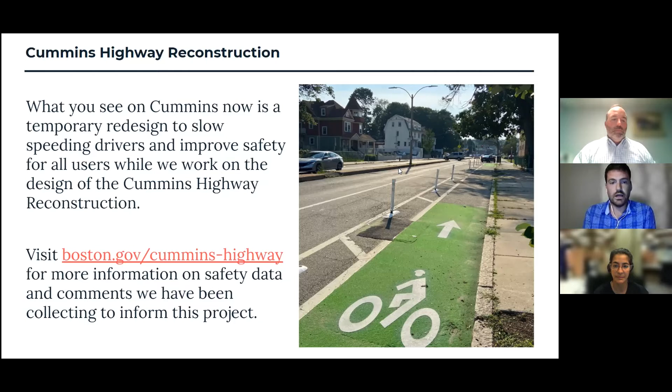So in the next slide, I'm going to go over some of the project history of Cummins Highway. Cummins Highway hasn't been updated since 1955. That's a long time. Back in 1953, the streetcars were removed, which provided more room for cars, reflective of the priorities of the 50s, which was to enable folks to drive through the neighborhood more quickly.

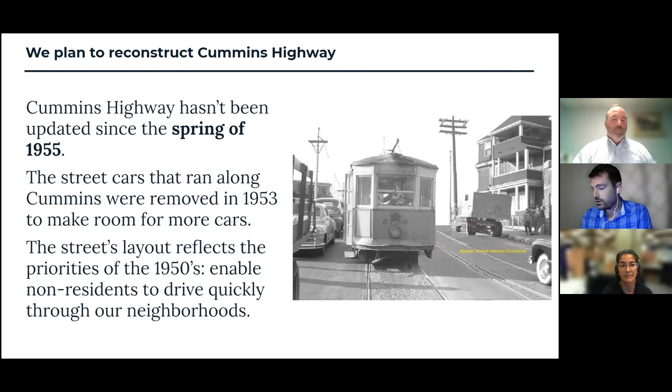Next, we're going to talk about what we're looking at for Cummins Highway as we move into the future, and what we're looking at for reconstruction. For a reconstruction project, it's a full reboot of the street. We're completely rebuilding everything, including sidewalks, curbs, street lights, what we're here to talk about tonight, traffic signals, the road pavement, and we'll update any utilities as necessary.

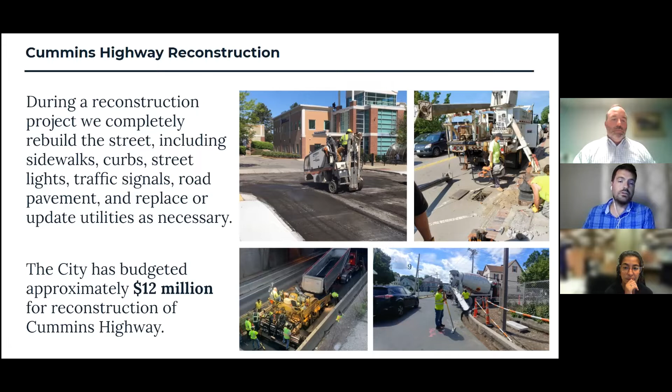As I'm sure you're all aware, even right now as we're implementing the pilot, National Grid is out on the street updating their infrastructure as an initial step. So we want to make sure all the infrastructure gets upgraded, and we have a whole chance to look at how the street is and how it functions today. We've budgeted approximately $12 million right now in the city budget for the reconstruction of Cummins Highway. So on the next slide, we're going to take a look at how we're interacting to develop the design.

As you know, we can't produce a design without your input. It was 1955 when the last major upgrade to Cummins Highway took place. So this is our chance right now to take a look at Cummins Highway and figure out what it should be for the next 70 or so years.

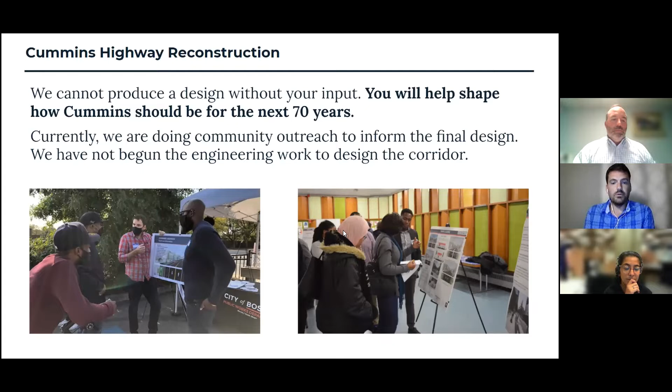We're still working through community engagement on the design, like this meeting, and we have not begun the actual design work. We're still talking out issues like tonight when we're going to talk about street lighting. The pictures below show some of the events we had with our pre-COVID in-person meetings, and some of our pop-up events where you can see Jeff and I talking to folks about the design and getting feedback. So in the next slide, we're going to jump into some of the overarching goals.

One of the things we're looking toward for this project is Go Boston 2030. What's that? That's Boston's transportation master plan heading into 2030, and the highlights are improving safety, reducing emissions, and equity and access to opportunities. Cummins Highway is certainly part of the Go Boston 2030 effort.

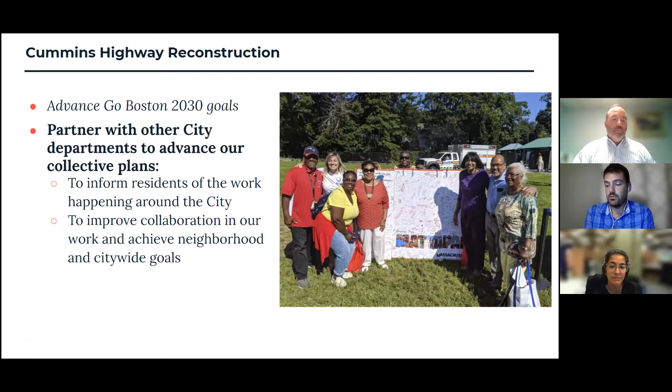So advancing those Go Boston 2030 goals, one of the key things we're doing is partnering with other city departments and communicating with them. These include, but are not limited to, the BPDA, Boston Transportation Department, Neighborhood Services, and the Disabilities Commission, to help us inform residents of the work and improve our collaboration in the neighborhood to achieve the goals of Go Boston 2030.

Also as part of that is continued collaboration with residents to advance your goals. We want to have awareness and participation in efforts you care about and confirm your vision for the future of the project. This means continued outreach like the meeting tonight to discuss key components like street lighting, so you can really help us inform that project vision. So now I'll hand over to Mike Donaghy from our street lighting division. He'll talk more specifically about the topic of the night, which is street lighting.

Thank you, Zach. Thanks to everyone for attending. It's my pleasure to showcase our street lighting team. I'm going to talk on three fronts. I'll start by giving you an overview of street lighting so you have greater context for our operation and overall purpose.

Then I'll jump into what's probably the most important part of the presentation, street lighting on Cummins Highway as part of the reconstruction effort. And finally, for additional context and looking toward the future, I'll talk a little about the future of street lighting and some applications that may potentially overlay well with street lighting infrastructure.

As the title of our department clearly states, we are responsible for the ownership, operation, maintenance, and replacement of a majority of the street lighting throughout the city of Boston, with the exception of properties managed by DCR, MassDOT, and MBTA.

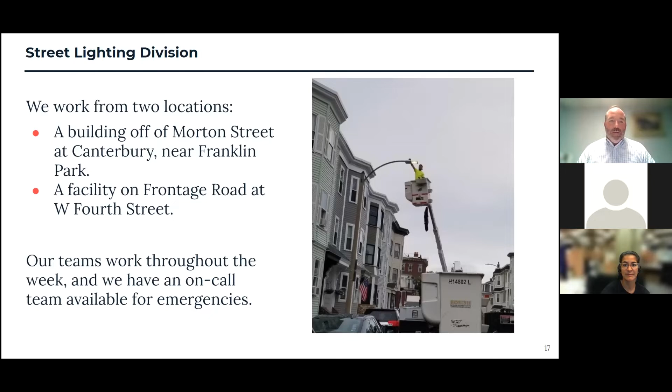We maintain and repair 19 different fixture types throughout the city. I'd like to tell this group I'd like that number to decrease as soon as possible. I'm a strong believer in streamlining inventory to maximize our maintenance schedules and shorten our times to repair. That's one of the long-term initiatives we have, streamlining the lighting without sacrificing any of the aesthetics we have in the city.

Our most common street lighting types are the Pendant, the Aeriata, the Cobra Head, and the Acorn. You'll find the Cobra Head and the Aeriata prevalent on Cummins Highway now, especially the Cobra Head, which is the double arm fixture in the median of the Cummins Highway roadway. The Pendant and the Acorn are in a different classification we refer to as our decorative pole types. Those are our most popular and are prevalent throughout all areas of the city. The Pendant fixture in particular is pertinent to tonight's presentation because it is the primary fixture, and to give credit to this project, the prime opportunity to really revitalize lighting in this area.

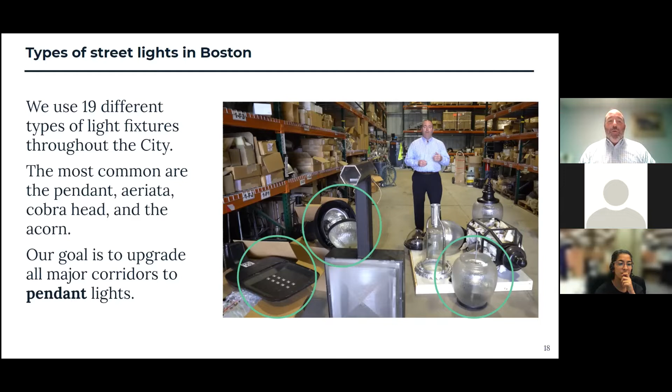The Pendant is a beautiful fixture that can be found on Center Street in West Roxbury, Hyde Park Ave, American Legion Highway, Huntington Ave, Beacon Street, Comm Ave out by BU, and other parts of the city. It's an extremely popular fixture, both because of its aesthetics and its performance on the roadway. As you can see in the last bullet, it really is our main goal to look at all major corridors and upgrade them to decorative lighting. It's the general idea that you're entering some part of the city through these main corridors, and from a street lighting perspective, obviously we're biased, but we think what better way to do that than with decorative lighting.

Starting in the fall of 2010, the city embarked on an aggressive campaign to upgrade all inefficient street lighting to LED. This was upgrading fixtures such as high pressure sodium, metal halide, and mercury vapor. In a very short amount of time, partnering with Eversource, the city achieved a substantial completion rate that has brought us to the point we're at today.

So this brings us to our next quiz. In the 10 or 11 years since we've started the LED program, how many lights, or what percentage of our lighting portfolio, has been converted to LED? Keep in mind, we're at 68,000 lights that we manage. We'll wait for your responses.

In the interest of time, I can let the audience know that we've completed upgrade of over 55,000 lights, which equates to 80% of our overall lighting portfolio. We continue to upgrade, and we're looking forward to continued partnership with Eversource to see that every last light within the city of Boston is LED. We have an opportunity through the environmental department, who's pursuing a performance contract currently out for bid, that will minimize, if not eradicate, our upfront capital costs to upgrading those lights. We're very excited about that, and we hope to have that done within the next 5 years.

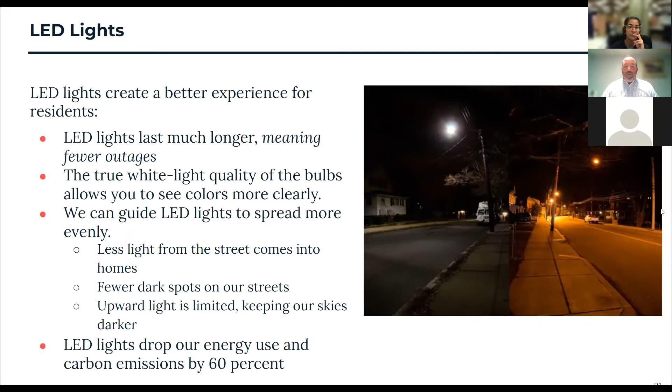There's another emerging area that we manage, and that is small cells. Effectively this is an FCC mandate to install telecommunications equipment on streetlight poles to improve network connectivity throughout any given area - certainly for our own interests, the City of Boston. The City of Boston Street Lighting Division is tasked with managing these telecommunications companies so that they conduct their operations from design through the construction phase, through operations and continued maintenance, in a way that maintains or improves the quality of life for the constituents that it interfaces with.

The benefit to the constituent is improved connectivity, but there are also abilities to improve lines of communication for emergency response purposes, and it prevents networks from getting proverbially jammed in the event of a catastrophe. I hate to put it in those terms, but that's exactly why the mandate is in place. Next slide.

So this is what we've all been waiting for. Before we jump to the next slide, I'd love to focus in on a few things, and I hope I'm not hitting on too many pains that anyone on the presentation has experienced. What I see here is a locational issue with a streetlight in the middle of a roadway, a very busy roadway. It's ripe for getting hit, and it happens quite often, as I'm sure you know. I see overhead wire going in three different directions, which I'll explain in a little bit. It's a necessary evil to get the light lit, but it looks terrible and it's inefficient from a logistical perspective.

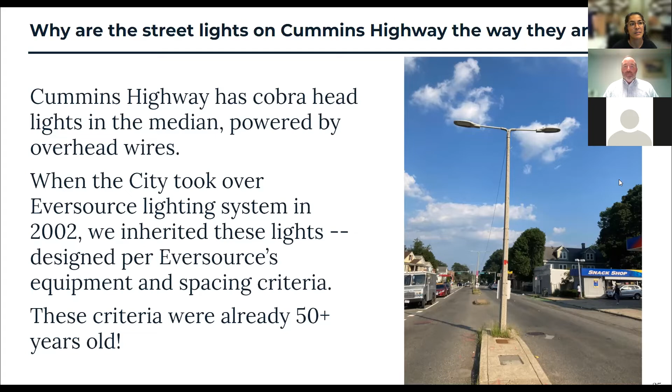Our general goals for this project, and for projects around the city, is to provide adequate, right-sized lighting, improve safety and security, make sure crosswalks are appropriately lit, that constituents feel safe, and that the benefit is multifold. In terms of spacing, the existing lighting is upwards of 100 to 150 feet apart. A pendant lighting pole, like you see to the right in this picture, is slated for 75 to 90 feet apart on both sides of the street. We think this not only meets the criteria for roadway lighting standards, it will provide a tremendous amount of illumination that shouldn't be too much.

I think the fact that we're meeting here today and presenting to you is a conversation that started early. We're looking to partner with you on these lighting solutions, so you shouldn't worry necessarily about overlighting. It's about bringing the lighting that's there up to the standards that exist throughout the city of Boston.

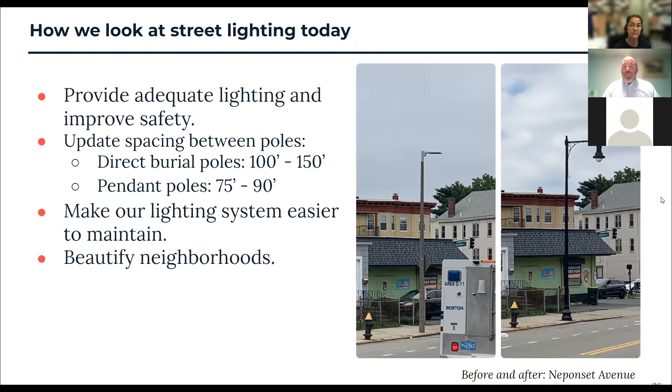One of the primary initiatives for any new lighting installation that we're very cognizant of is making sure we're not contributing to light pollution. Our goal is to improve the quality of life for everyone and everything involved, and so we take very seriously any type of criteria and specifications of the street lighting we install.

A majority of our street lighting is focused on down lighting, which helps mitigate light pollution and helps us work towards dark skies compliance.

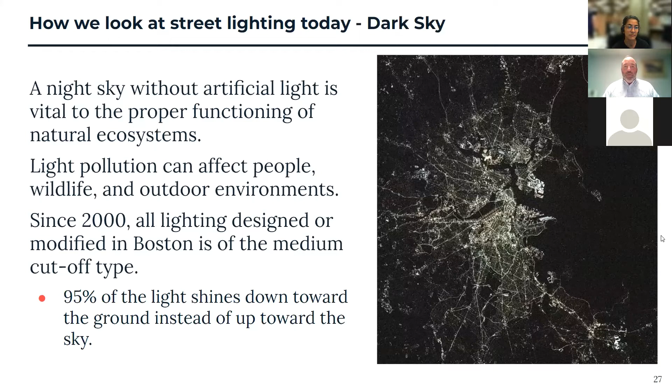I'm very excited that this project will entail installing a brand new street lighting system. That means infrastructure, underground conduit, pole bases, cabinet bases, pole box bases, and certainly new lighting. This will be brand new and in great shape for decades to come.

What I personally really enjoy about these lights is the scalability. We're going to be able to improve the distance compared to what the lighting is there now. And while this is designed as roadway lighting, and we are technically the street lighting division, as the world changes in terms of urban planning, we're now moving towards sidewalk lighting and trying to expand our own horizons as it relates to roadway and sidewalk lighting.

That small light you see mid-pole is prevalent in Nubian Square and helps to light what appears to be a bike path, but also provides benefits to sidewalk lighting and pedestrians passing by. You can see an example of that in Nubian Square, and an older example is in Upham's Corner.

Some of the current and recent projects we have—I mentioned Neponset Avenue, we saw the picture of the before and after. It's all of our internal street lighting team. They do a fantastic job and take great pride in their work, and we've embarked on Neponset Avenue, which has been a nice start.

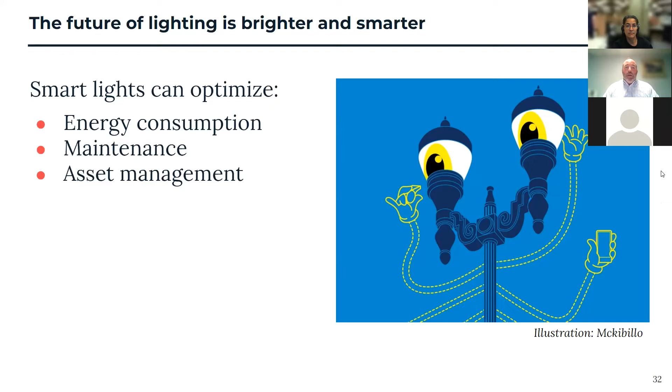Next slide. Again, the possibility of providing a 24/7 power source is there. Traffic counts and traffic monitoring is another potential, and again, it's the ability to have location-specific information that can be helpful either to constituents or to basic city services.

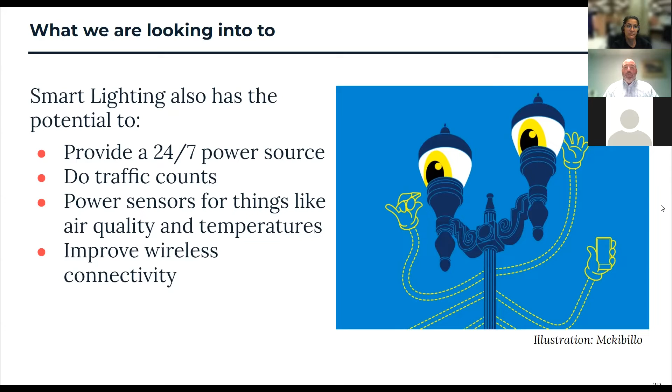One area that I'm particularly interested in is ambient air monitoring and temperature sensing. Having worked snow fighting for the last 4 years, and actually having Cummins Highway as my route last year, having the ability to identify temperatures across the city allows for more predictive management of our snow fighting forces. It's something that's very intriguing, and I think is in some ways low hanging fruit, because if you can get a temperature sensing device onto these lights, it'll be a profound help to our snow fighting operations.

Next slide. So, questions for you. I think this is the point that I turn it over to Daniela.

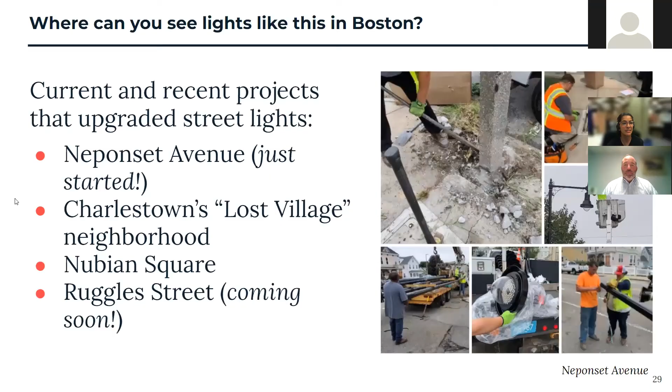The ability to put on that pedestrian light is entirely scalable. It isn't required. You may have locations where the pendant pole is close enough that the sidewalk is illuminated. There may be other times that this is the preferable option. That's what we like about this particular fixture family, the ability to scale not only the design of the light, but also the illuminance and light levels. We can scale all of that to tailor it to the constituents' requests.

Barbara, did you have anything else to say? I see that your hand's still raised. Yeah, will it be operated by solar power, the lights?

No, that is not in the design. They'll be powered underground and fed back to a streetlight control box. That is the main operations center that will be powering the lights. Those take redundant feeds from the utility manhole and will utilize a control pole system where one pole will monitor the light levels during the day and then initiate the lights as it gets darker into dusk, or turn off when dawn presents itself. It's the system that's prevalent throughout the city and something we feel works pretty well.

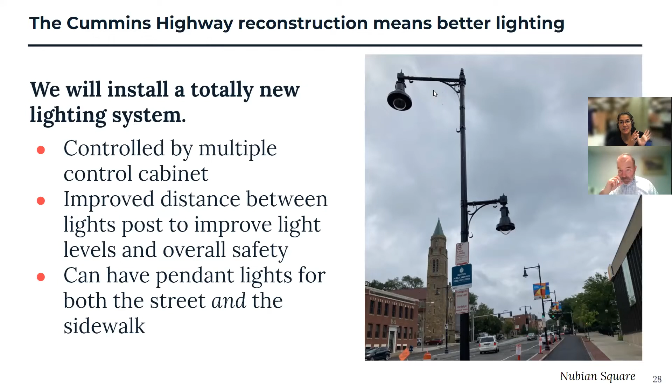Before we move on, Mike, could you speak a little bit as to why we prefer to have this system versus solar power lights usually?

We've looked very closely at solar powered lighting, and right now we can't count on the reliability of the light. You effectively need a battery backup that can withstand the power requirements of the lighting for undetermined amounts of time. If the solar panel isn't catching the light correctly, it leads to variables in low power charging and presents too many issues with either low light level or no light level scenarios. We looked very closely at this for a lot of our alley lighting down in the Harrison Avenue area, and we simply can't count on the reliability of the light staying lit when we need it to be illuminated.

I will now ask Kenya to unmute. I have a question and a comment. The question is, what is the brightness or the wattage of the bulbs in those light fixtures?

So for a given pendant light, it's 75 watts. And one of the first notes I took down was about color rendering and Kelvin ratings. I won't bore anyone who hasn't delved into that world, but effectively color rendering has to do with the light color. We strive to have a warmer light as opposed to a very bright white light. At my own house, I brought home 4,000 Kelvin LED screw-ins, and I had a problem because of how bluish the light was, and my wife let me know that. So we have a great appreciation for light levels and striking that balance of making sure there's sufficient lighting in the roadway, but not making it too cumbersome to your overall quality of life or overlighting your front yard.

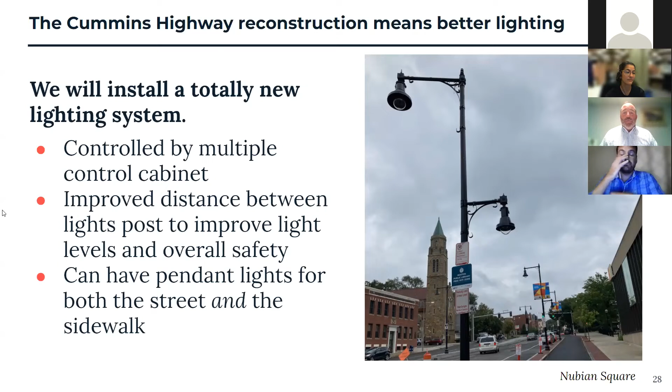We see this as a tremendous opportunity to put in a light that we think will work very well in this area and certainly improve lighting levels. But as it interacts with tree and canopy design, that's something that would be a larger question for the engineering department.

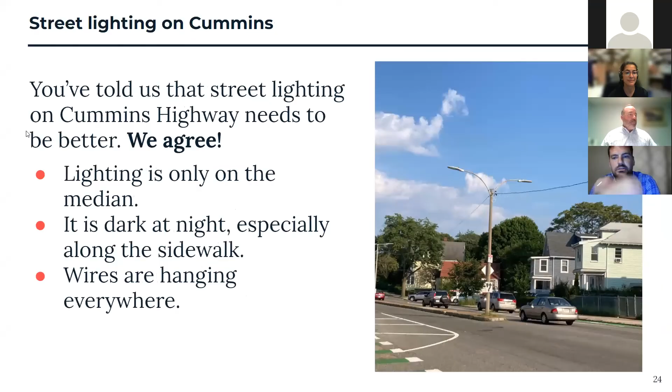Sure, and I'm happy to chime in. All of this is comprehensive. I don't know if you caught my slides at the beginning, but we're looking at an entire reconstruction of the street. So this includes new sidewalks, new lighting, new street trees, paving the street. All of that is factored in. So as we take a look at reconstructing Cummins Highway, we're looking at all of those elements, and all of those are tied into one comprehensive design.

So the location of the street lights are there to provide adequate lighting, not only for people driving on the street, but for people biking and walking. There'll be space so that they're not blocked by trees. New street trees will go in, and the lights will be positioned so that as the trees grow, they're not interfering, and they'll be at appropriate locations to light up crosswalks and make sure the street is a lot safer for all users.

So yes, it's totally a comprehensive effort. This meeting is just specifically to talk about the details and get some feedback from you all about the lighting and what we're thinking about it. But yeah, everything ties together in this roadway design.

All right, that would be my hope for the community. So if I can pursue a couple of follow-up questions: there was conversation about the potential that each of these streetlights had, right? So potential is different from actual use. Is there a plan already for what will be the minimal features of these lights? And are there options for us to start talking about these other potential uses?

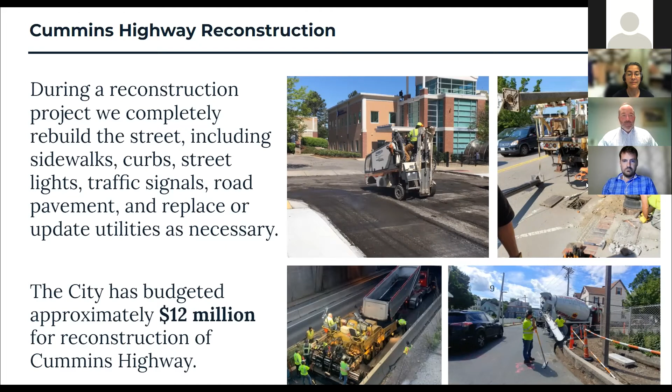Lastly, maybe you'll tell me this was again just your talk. Somewhere on the slide, I thought you said the sensor data could help prevent crashes. So I was like, wow, that is a powerful light pole. So just talk about that a little more, because that's what the community's been told, that we've had enormous accidents, a large number of accidents out on Cummins Highway, and that we should care about all those people losing their lives, which we do.

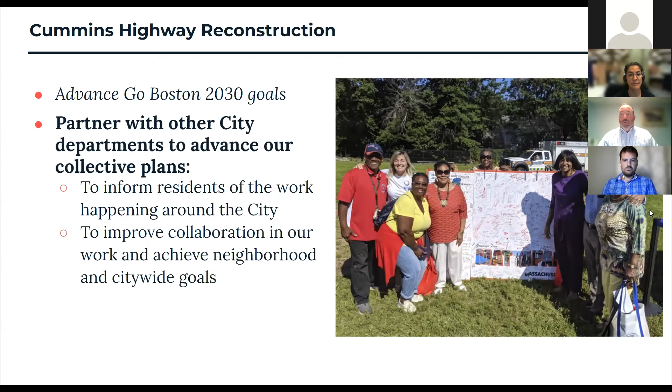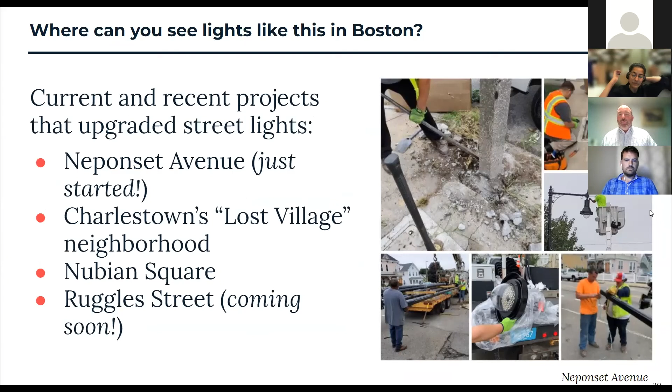Of course, absolutely. If I gave that impression, I would definitely want to step back from that. The benefit we're providing is greater light levels, so there's improved visibility. But for it to be able to prevent crashes delves into an interaction with the end user that I don't think the street lighting is capable of. Our goal is to light appropriately and make it as safe as possible, but there's nothing I know of that will specifically prevent crashes or that we can claim.

So the one Mike is speaking of, as well as what we've been using our current light posts a lot for, has been to try some sensors with some of the other departments around the city. One of the uses for these sensors has been to monitor traffic and also collect data that we can then use to inform design that will help us prevent crashes. So we use this data a lot on our Vision Zero work and through our redesign work when we are looking at a corridor. Sometimes we install these sensors so that we can continually get data, not just at one point. This is something that could also be an opportunity later on to have more continuous monitoring that will help us make changes if necessary to our streets.

Someone had a question, and I also wanted to mention that in our previous meeting with the environment department, where we talked about air quality, we also talked about monitoring air quality as one of the sensors that could be possible, which I know a lot of people had interest in, especially because of the many different types of uses that happen on the corridor and how traffic bunches and stuff like that. So this is something we're also looking into now as the project is not rebuilt yet, continuing to monitor that as a continuous project to learn more about air quality and how we can improve it.

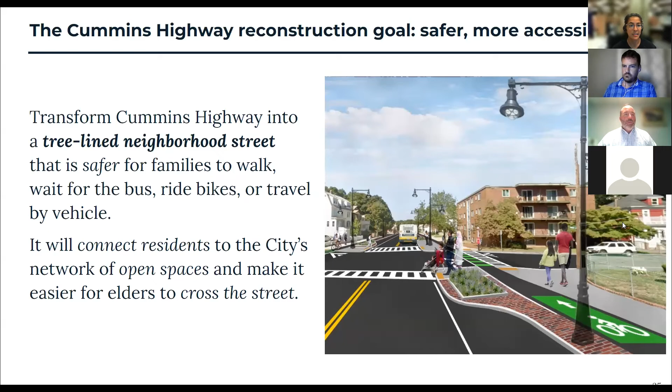So the goal of the Cummins Highway Reconstruction is a safer, more accessible Cummins Highway. We hope to transform Cummins Highway into a tree-lined neighborhood street that is safer for families to walk, wait for the bus, ride bikes, or travel by vehicle. It will connect residents to the city's network of open spaces and make it easier for elders to cross the streets. This is a rendering on your right-hand side of the concept design presented back in 2020.

So the timeline of where we've been in this reconstruction project: we started engagement before this, but the first public meeting was on April 11th, 2019 at Mattapan, near Cummins. There was a presentation where we talked about the overall goals, and people gave their feedback on what they would like to see. We had a second public meeting on October 29th, 2019.

And then a third meeting, again to make sure we gathered enough feedback, presenting some of the design concepts drafted based on comments from the first meeting. In the third public meeting, we presented those design concepts. And then, as many of us have experienced, we had a pandemic.

During that time, we were starting to test some of the things we heard from the third public meeting, like people wanted us to try the concept of one lane each direction. So we began a design trial in July of 2020, which went through October of 2020. As you remember, it was the one with the water barriers, white and orange, along the road.

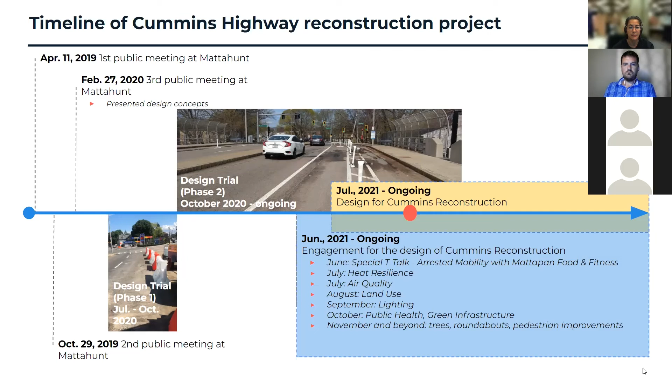So where we are now is that we began engagement on the final design for the Cummins Reconstruction. This began in June of this year. As we mentioned, your input during these discussions is used to inform the design of Cummins, and is also shared with other departments we are working with.

They've also been participating in many of these meetings. In June, we hosted a special edition of T-Talks with Charles Brown. T-Talks is a discussion hosted with Mattapan Food and Fitness, along with other organizations local to Mattapan, where we discuss the ways the mobility of Black Americans is limited in the US through police, policy, and politics. There we gathered feedback about what people wanted to see in these changes.

Then in July, we hosted two virtual meetings with the Environment Department. One was about heat resilience and the redesign on Cummins. You mentioned you'd like us to add more shade, so we're looking into trees and shelters throughout the redesign. You were also concerned about the impacts of the temporary design on emergency services and traffic, which we've continued to monitor.

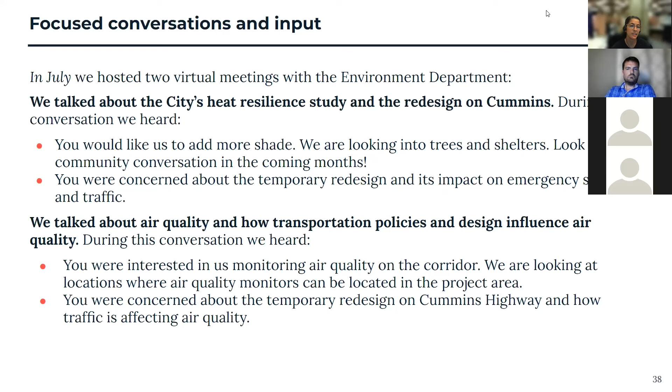We also had a discussion about air quality with the Environment Department, and how transportation policies and design influence air quality. You were interested in us monitoring air quality on the corridor, so we're currently looking at locations where air quality monitors can be installed before reconstruction, so we can monitor before and after changes. You were also concerned about the temporary redesign's effect on air quality, which is why it's important we deploy these as soon as possible.

Last month, we met with Plan Mattapan. Some of you may be familiar with this work and how it relates to transportation and how our departments collaborate. It was a shorter meeting than some before. You asked us to think of Cummins not just alone, but as part of a network, looking at traffic on side streets and how Cummins' travel patterns relate to the neighborhood. With that in mind, we've been documenting traffic on side streets and seeing what improvements could be done there.

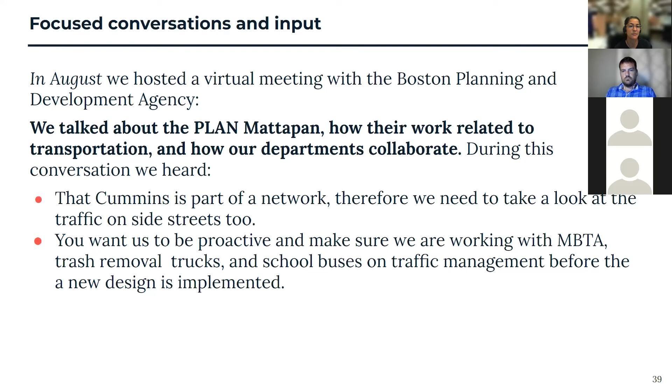You also wanted us to be proactive and make sure we're working with the MBTA, trash removal trucks, school buses, and traffic management before this new design is implemented on Cummins Highway. So we've reconnected with them and started conversations again in preparation for starting the design work with engineers.

So this brings us to what's coming next. After this conversation with Mike, we'll be posting these meetings online so you have access to them, as well as share them with your family, friends, and neighbors. Feel free to continue sending us comments.

The next conversations will focus on public health and how street design relates to health impacts, on October 5th at 6:30 — again, virtual meetings. Then we're having a meeting on green infrastructure and the possibilities and opportunities for the Cummins Highway redesign on October 20th, again at 6:30.

In October, you can stop by the Mattapan Farmers Market to chat with us about the Cummins Highway redesign and next steps — that's Saturdays in October from 10 a.m. to 1 p.m. As always, since almost the beginning of 2020, you can book an appointment to chat one-on-one. Jeff usually takes these, but he's out on leave, so you'll meet maybe with Zach or with me, and we can go over specific details you're interested in. As always, we take all this back and work it into the design.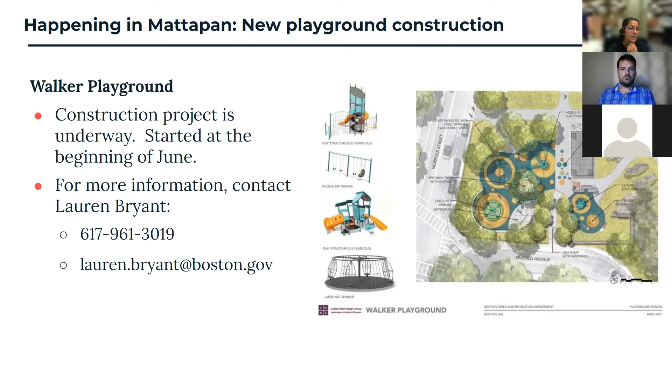This month is Bike Month in Massachusetts. You can celebrate with Mattapan Food and Fitness by going to the Mattapan Farmers Market. The address is 888 Cummins Highway on Saturdays, starting September 4th and going until the 25th. The last day will include giving away bike parts and helmets, and there will also be a musical performance. If you miss this one, the next one will be there.

There are some beginner-friendly rides led by community residents on Monday nights at 5:30. They meet at Mattapan Square T-Stop and ride along the Neponset River Greenway, one of the open spaces we're hoping to connect with this project for people safely. There will also be a ride on the 26th along the Neponset Trail with the Women on Wheels team and us at BTD, meeting in the parking lot on Hill Street near Pope John Paul II Park on September 26th at 11 a.m.